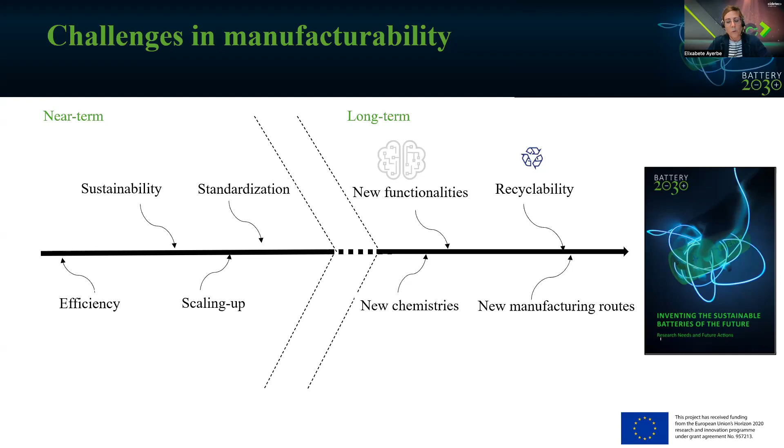So all of this is covered within the Battery 2030 Plus roadmap, particularly in manufacturability. We have addressed these activities from the Industry 4.0 perspective—we aim to have digital tools covering not only manufacturing but also cell performance. Starting from current lithium-ion manufacturing routes like roll-to-roll, we should have very accurate models that mimic the processing and machine performance, so we can control how machine parameters impact outcomes on components like electrodes, cells, or steps like electrolyte filling.

Within the roadmap, we visualize these accurate models that mimic manufacturing but also need to be computationally efficient. This relates to manufacturing, but we cannot forget the digital twin of cells, in which we mimic all the scales of the cells and are even capable of virtually reproducing cell degradation. This is seen in the roadmap as a coupled vision, coupling cells together with manufacturing, so that in the end we're able to perform inverse design—for a certain application, we can know exactly which are the best components and how they need to be manufactured.

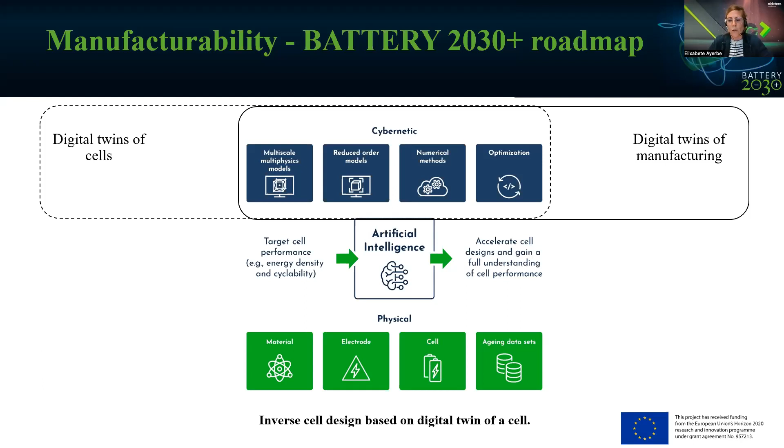So these digital twins will accelerate the scaling up, make manufacturing more efficient, and for sure more sustainable. This is seen from a very holistic view.

We are dealing with digital twins capable of mimicking these cells from a multi-scale approach, which can be multi-physics based models, but also data-driven models or even surrogate models, in order to have efficient codes that can reproduce cell behavior over a number of cycles, coupling and addressing all the scales along the cell. These digital twins of cells will be coupled to digital twins of manufacturing.

We also need to address the flexibility or modularity of manufacturing, because currently we are working on roll-to-roll applications where we manufacture electrodes through different steps like slurry preparation, drying, coating, or calendering. But in the near term or longer term, there might be different manufacturing routes like additive manufacturing, 3D printing, extrusion, or whatever is needed for the different chemistries that will come out soon.

So in Battery 2030 Plus, this is seen as a holistic view. We're dealing with standards, providing guidelines, recommendations, and a standard language in order to monitor all the manufacturing steps. But we cannot forget that within Battery 2030 Plus, we have set up different approaches like BIG-MAP, or even self-healing and sensor implementation. Manufacturing somehow closes all these aspects already covered within Battery 2030 Plus, and we include them as a way to accelerate the scalability of these approaches.

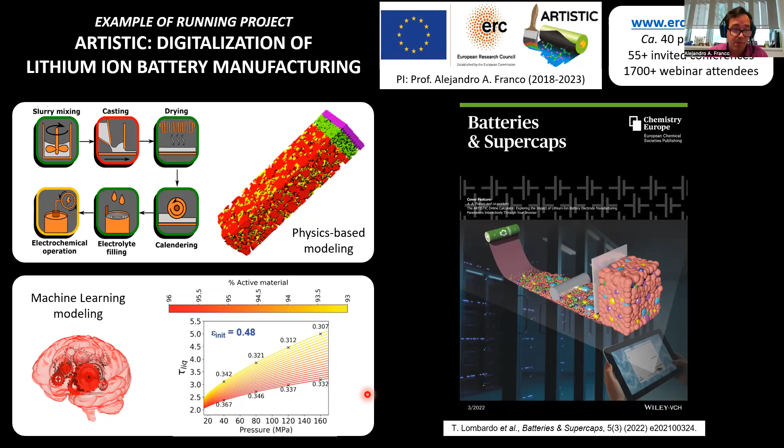For the followers of this project, you will see that I will share some old examples, but also several new examples from some of our very recent publications, published this year or even yesterday. So then the first question is: manufacturing digitalization.

Why should we try to digitalize the manufacturing process of lithium-ion batteries in particular? As you know, lithium-ion batteries are everywhere, even allowing the re-emergence of electric vehicles. Inside the cells of these lithium-ion batteries, we have electrodes. Depending on the spatial location of the active material, the conductive additive, mostly carbon particles, and the binder, this cell is going to have different energy densities, power densities, lifetime, and safety.

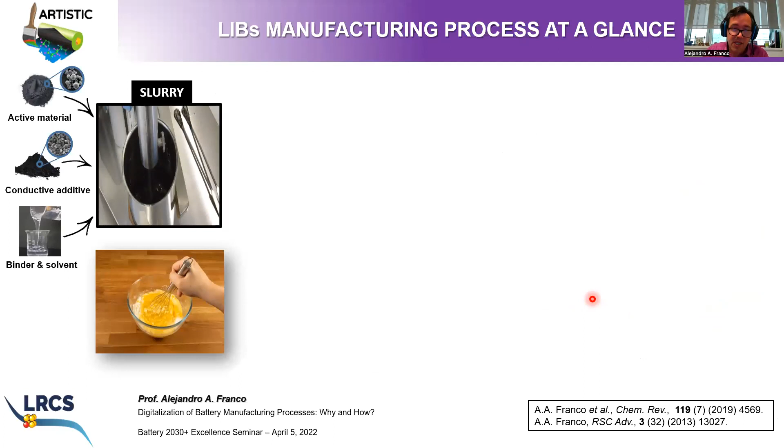Therefore, it's very important to control the interfaces between these materials inside the electrodes. In order to control these interfaces, we need to talk about how we manufacture these electrodes. The manufacturing process of lithium-ion battery electrodes is highly complex, involving multiple steps and multiple parameters.

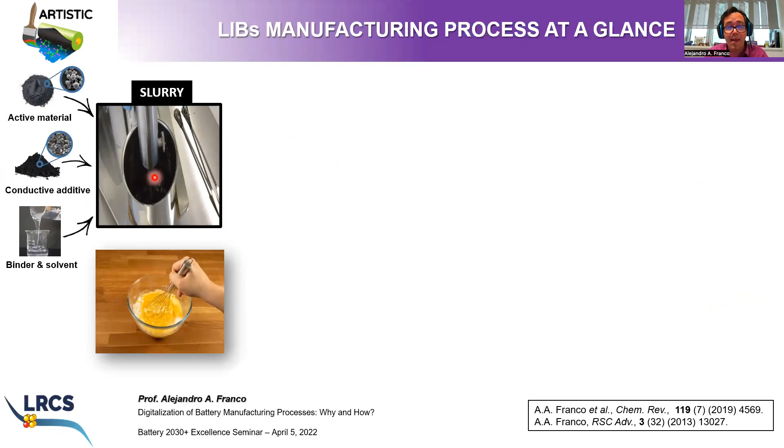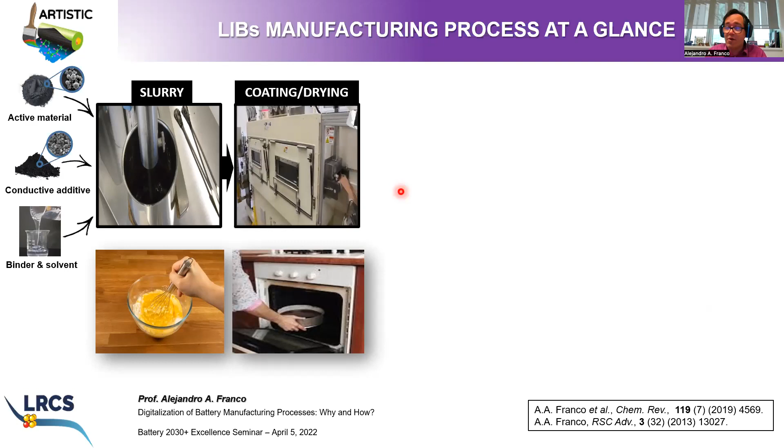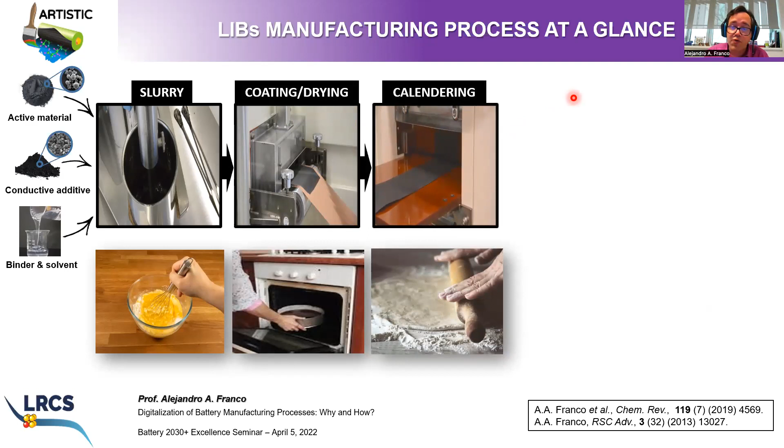First, what we do is mix materials in a solvent: the active material, the carbon additive, and the binder. We mix them to prepare the so-called slurry. Then we cast the slurry on a current collector to prepare the first electrode of the lithium-ion battery cell. We pass the resulting coating in an oven to evaporate the solvent, and then we get the dry electrode. Then we perform the calendering, which consists of applying pressure on top of the electrode to improve the electronic contact between the particles. Then we perform the same process for the second electrode.

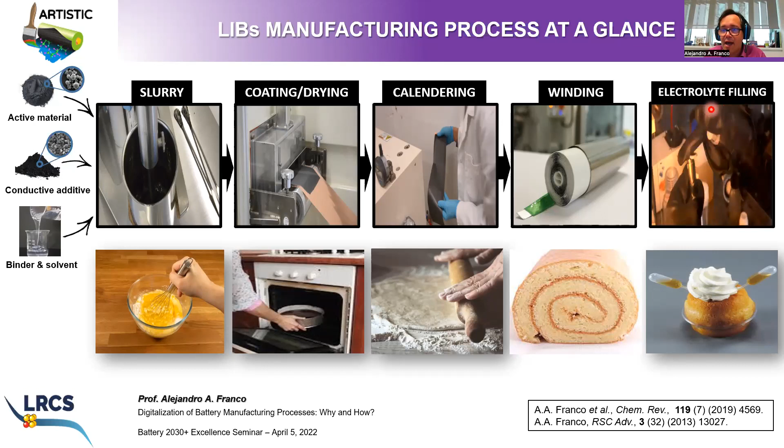We will put a separator in the middle, and we will perform the winding, in case we are interested in cylindrical cells. The step after this one is, of course, the electrolyte filling. We need to fill the cell with a liquid electrolyte in order to ensure the proper exchange of lithium ions between the two electrodes. Then we are going to close the cell, and we will get this lithium-ion battery cell ready to use.

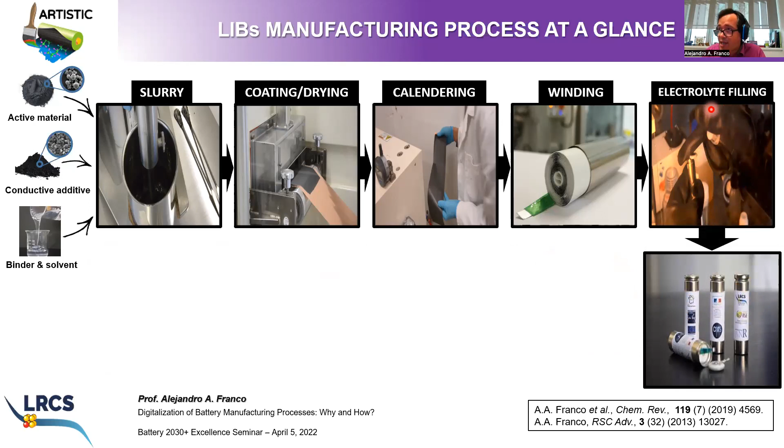So as you saw in the slide, manufacturing a lithium-ion battery electrode is like cooking. You really need to choose the right parameters in the right way in order to make proper battery cells. Indeed, when you take a look at the number of parameters involved along this manufacturing process, what we can say is that this is a very complex parameter space because we have multiple parameters, but also a lot of interdependencies between these parameters.

You can actually represent the lithium-ion battery manufacturing process as different gears which are linked with each other in a sequential way. And if you remove or tune improperly one of these gears, then the final result, which is a lithium-ion battery cell, will not be what you desire. This is why it's very important, first of all, to understand the links between these different process steps and the impact of these links and the involved parameters on the resulting lithium-ion battery electrode microstructure and also lithium-ion battery cell performance.

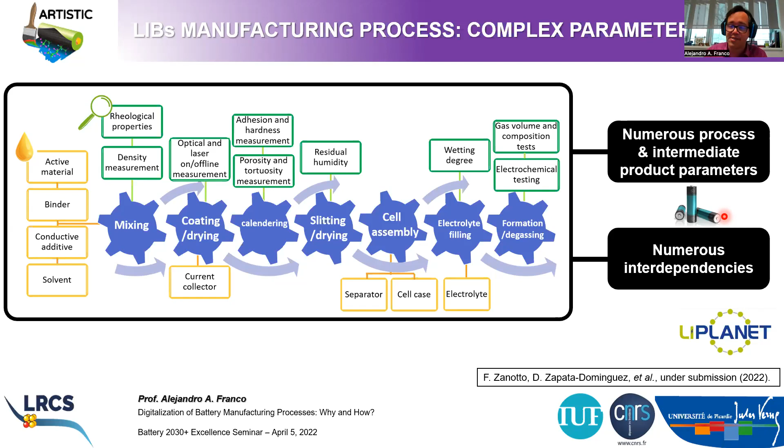State of the art for doing this is trial and error. And of course, if we are doing trial and error, we should expect high scrap rates. If you are, for example, at the prototyping level, we could estimate that you will have scrap rates of around 30%, while if you are manufacturing cells in series with very well-established protocols and so on, maybe you will be around 5%. But still, this is a lot.

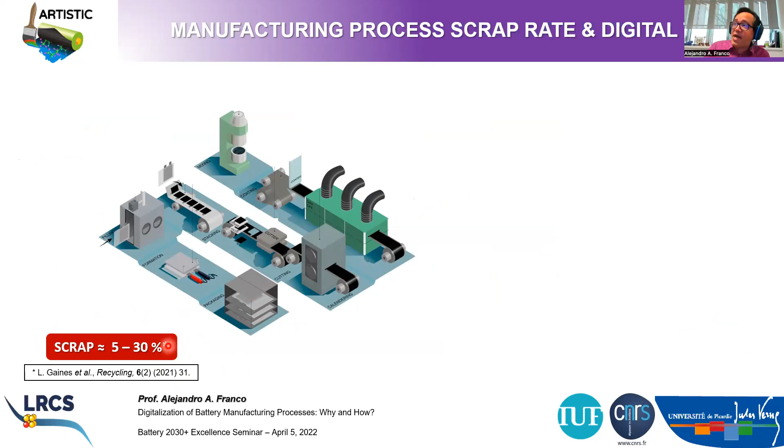Something that battery manufacturers are dreaming of is having somehow a digital twin, which is actually a copy in the computer of the actual manufacturing process, which can provide through actuators real-time indications to the machine on how to optimize the manufacturing process of the lithium-ion battery electrodes.

In order to have this concept working, in order to have this digital twin that can provide real-time instructions to the machine, of course we need also to implement sensors in the machine. So the topic of sensing is also very important towards the development of a digital twin, because these sensors are going to collect real-time data in the machines and fill this digital copy in order to feed it, so that this digital twin can provide recommendations to the machines.

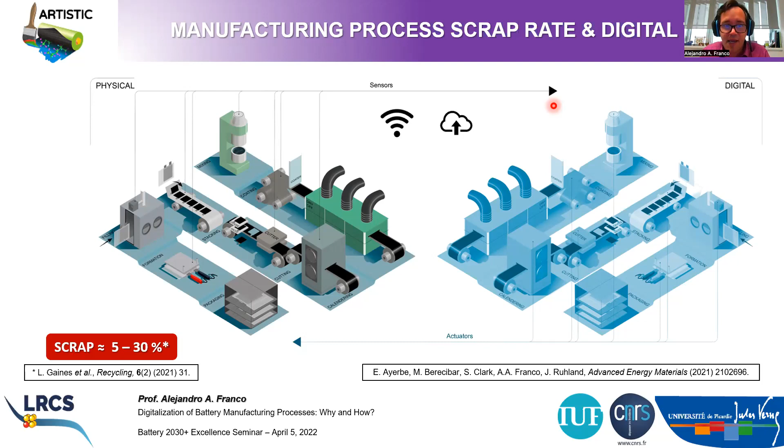But what do we have in the core of this digital twin? How is this possible, how can we imagine copies in the computer that can provide real-time recommendations to the machine in a way that the machines can by themselves optimize the different manufacturing steps involved in this process? Well, this is possible because in the core of a digital twin, what we have are models, computational models. And we imagine two types of models in the core of this digital twin.

So physical models, which are actually models based on the description of the physics going on between the different particles, which are being mixed, which are being cast, which are being dried, and so on and so forth. These kinds of models can be very useful for understanding in more detail the different manufacturing steps and the influence of the different manufacturing parameters on the electrode properties, but also they can be very useful for predicting the influence of manufacturing parameters on electrode properties and cell performance.

On the other hand, we can have machine learning models. These machine learning models are very, very useful tools to discover correlation between input parameters and output parameters. And this is very important, in particular, when you are dealing with a highly dimensional parameter space. So we are dealing with many parameters, and this is typically the case in lithium-ion battery manufacturing.

These models can also be very useful to derive surrogate models, simplified versions of the physics-based models that can be integrated in optimization loops, that means in algorithms that can perform quasi-real-time optimization. So these types of models, they have both cons and pros. First of all, if we talk about the physical models, if you go to a three-dimensional description of the battery manufacturing process, you can get very high accuracies.

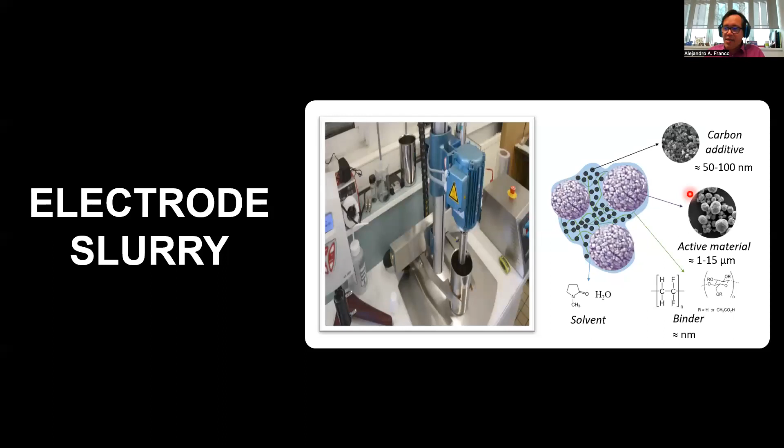So you see then that these two techniques are highly complementary, in the vision of developing a digital twin. This is why in the project we are dealing with both: modeling the manufacturing process based on physical models, and modeling the manufacturing process based on machine learning models. In the next 50 minutes, I'm going to show you examples of different models that we are developing in this project for each step of the manufacturing process, starting with the electrode slurry.

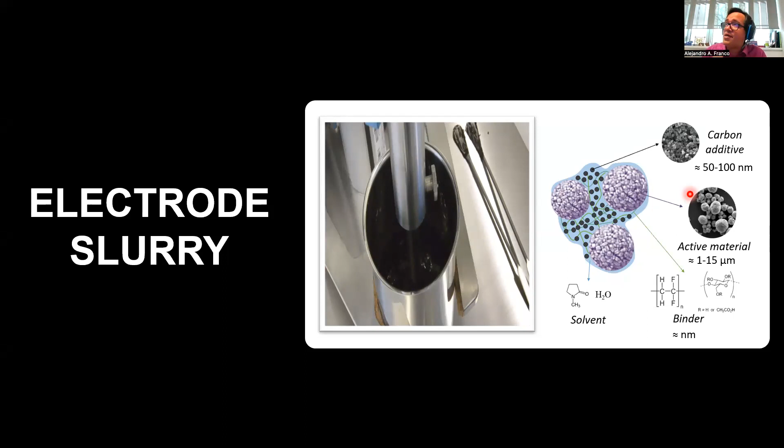The electrode slurry, as I mentioned at the beginning, is a suspension of active material, carbon additive, and binder in a solvent.

In order to model that, based on a physical modeling approach, we use a coarse grain representation of the particles which are in the suspension. And we define basically two types of particles for non-aqueous slurries, which are representative, for example, of slurries containing NMC 111 as an active material.

The two types of particles that we use are the active material particle, which is the grain representing an active material particle, a secondary particle of NMC 111, and a second grain, which is the CBD particle. CBD stands for carbon binder domain, and this particle contains carbon, binder, and solvent.

We do it this way because if you start to describe all the atoms and molecules present in this system, you will need a very huge computational cost in order to solve the system of equations that will allow you to predict the slurry structure. That's why we simplify the system with this coarse graining approach, and instead of representing the interaction between atoms or molecules, we represent interaction between these effective particles: grain, active material, and CBD.

Thanks to this simulation, we are going to be able to predict in 3D microstructures of slurries. The input of this model, this coarse grain molecular dynamic simulation, will be the active material particle size distribution, which is something we can extract from experiments, and the formulation, the weight percentage ratio between active material and CBD.

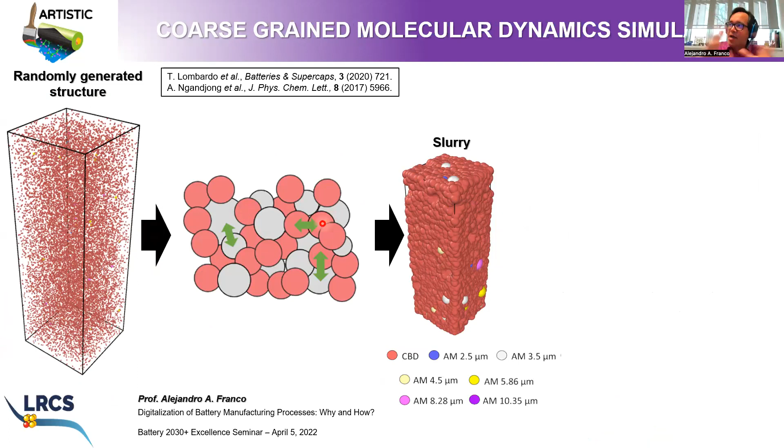Then you will solve the interaction forces between these different particles. More precisely, you will solve Newton equations with forces acting on each type of particle, resulting from Lennard-Jones force fields and granular Hertzian force fields that describe attraction and repulsion between the particles.

They are going also to describe the cohesion between the particles, the viscous behavior of the collection of particles, and so on and so forth. And then by solving these Newton equations, you will reach at some point the equilibrium state, minimal energy of the system, and you will converge to the slurry microstructure.

Once you get this virtual slurry microstructure in the computer, you can characterize it in terms of the density, in terms of the viscosity, and then you can compare the numbers that you get in the computer with the ones that you can characterize at experimental level.

Here you see examples for the viscosity calculated as function of the applied shear rate for two different slurry formulations and for different solid contents. And you see here a very good comparison of what we calculate with the model with what we can get at the experimental level.

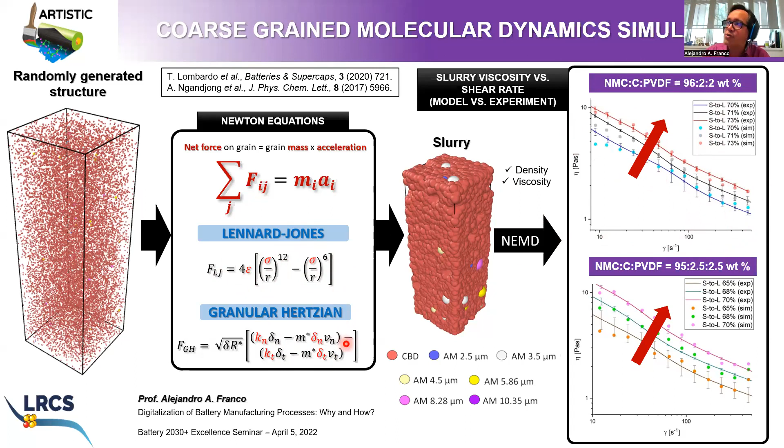Here, of course, in order to have this very good fitting, what we do is we fit the parameters, these 6 parameters which are represented here in red in the equations, in order to match perfectly all the conditions. In order to do so, we use optimization algorithms - particle swarm optimization and machine learning.

Just to give you a flavor of how we do this, we basically use this combination of a technique called functional principal component analysis and k-nearest neighbors, which is a kind of machine learning technique, in order to predict the result of this coarse grain molecular dynamics simulation before the simulation ends. In that way, as we can predict from the very early steps of the simulation, we can predict what will be the viscosity value that the simulation will be able to obtain.

Then we can integrate this forecasting technique in an optimization loop that allows us to fit the experimental curves more quickly. And this concept, which we have published very recently as a preprint, it works for slurries made of NMC 111, LFP, or graphite. Before, we were needing few days to fit a viscosity curve with one of these models. Nowadays, we need only few hours to fit a full viscosity curve coming from experiment with this kind of model.

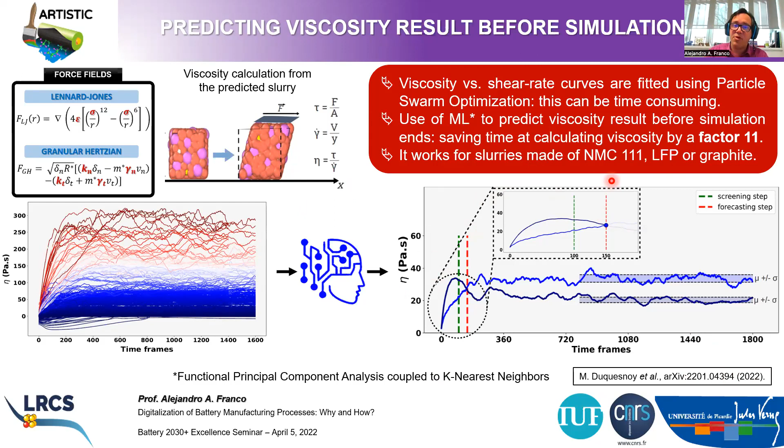The second step is the coating and the drying. And this is something that we simulate also using coarse grain molecular dynamics. And the way that we proceed is the following: so we take this virtual slurry.

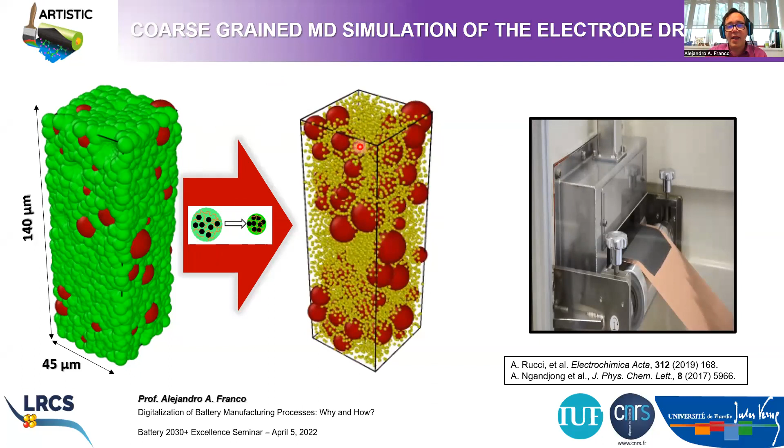We shrink the CBD particle size in order to mimic the solvent evaporation. Then all these green particles here representing the CBD, which initially contains carbon binder and solvent, they become smaller. They're represented now here in yellow. Then the interaction forces between the particles change, and then we relax the system again.

So we run once again molecular dynamics, we solve Newton equations. And then the final state of this simulation will be the dry electrode microstructure. And this dry electrode microstructure, you see here in red, the active material particles, and in yellow, the carbon binder domain, which in this case doesn't contain any more the solvent.

And this virtual electrode microstructure can be validated with, for example, different type of descriptors, such as the porosity of the virtual electrode. And this porosity of the virtual electrode can be compared with the experimental one. But also you can imagine calculating the electronic conductivity of this virtual electrode, the tortuosity factor, and so on and so forth, and compare also with the experimental values.

The model is also able to capture the impact of the drying rate on the microstructure, and in particular on the phenomenon called CBD migration or carbon binder migration. And here you see how this works.

Basically in the model, we imagine that the CBD will shrink at different rates depending on the depth of the slurry. So if you are on the current collector side, the CBD will shrink at a rate much slower than the one that is on the top. And in that way, we are able to calculate, to predict electrode structures that will be heterogeneous along the electrode thickness in terms of CBD volume fraction.

And this is something that can be very nicely also quantified. If you track the evolution of the CBD volume fraction along the thickness of this slurry that then is becoming an electrode, you see that for high drying rates, if you focus, for example, on this series of 3 red curves, you see that there is a high heterogeneity. You have much more CBD on top than at the bottom.

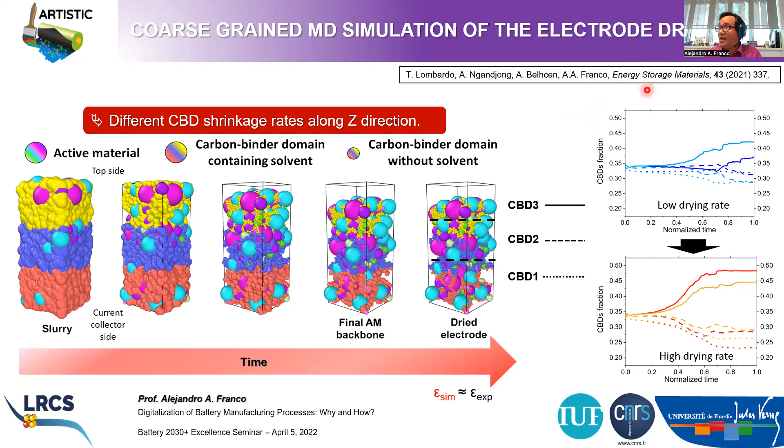You can also address the topic of slurries, coating, and drying using machine learning. This is a quite old work that we published actually two years ago, but as far as I know it was the first one addressing this problem using machine learning.

Basically, what we did is collect experimental databases. As an input, we were playing with the slurry formulation, the solid content, and the viscosity, and we were measuring the impact of these three parameters on the active loading of the electrode and the porosity of the electrode at fixed drying conditions. So we collect this kind of data set here that you see, they're very noisy, you cannot tell anything very clearly here.

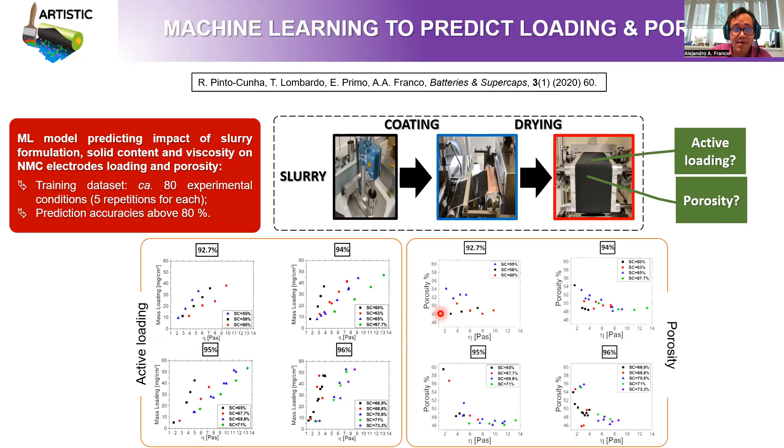So what we performed is an application of machine learning, a supervised machine learning technique called support vector machine, which allows transforming these noisy data sets into something more understandable or readable by experimentalists. Basically, this support vector machine technique allows transforming this cloud of points into phase diagrams for battery manufacturing. Here you see an example of the kind of result that can be obtained with this technique.

Here you see the impact of the formulation, meaning the amount of NMC in your slurry in weight percentage, the impact of the solid content of your slurry, and the impact of the viscosity of the slurry on the porosity that you will get in the electrode after the drying process.

This output is telling you that, for example, in order to make electrodes with low porosity, which in this case means electrodes with more or less 30 to 35% porosity, you need to choose the appropriate content of NMC, the appropriate formulation, and also the appropriate viscosity for your slurry and the appropriate solid content.

Because if you choose, for example, a viscosity that is too low and a solid content between 60 and 70, it will be impossible for you to make electrodes with low porosity. If you want an electrode with low porosity, you need to increase the viscosity value and mostly use high solid contents. This is the kind of outcome that this machine learning modeling can give you.

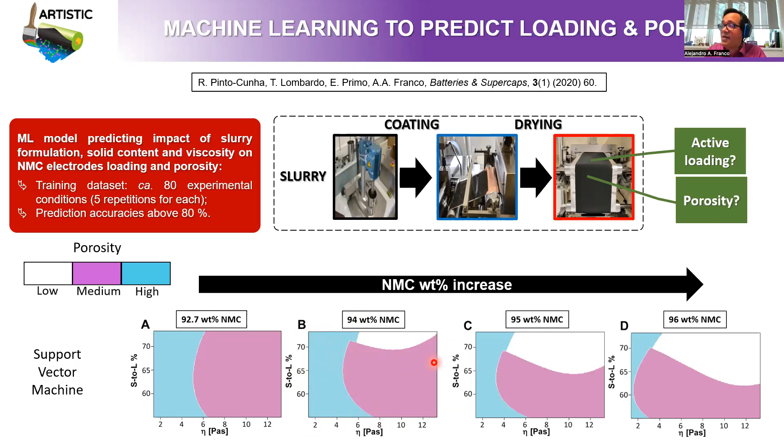We believe this is very useful for experimentalists because this is a kind of phase diagram that can very easily be understood, for example, by the technician making battery electrodes in the pilot line.

This concept for casting, mixing, drying, and so on can also be extended to other battery technologies, in particular solid-state batteries. This is a work we jointly published with the group of Shirley Meng last year, where we extend the methodology developed in the previous paper to the concept of developing solid-state separators.

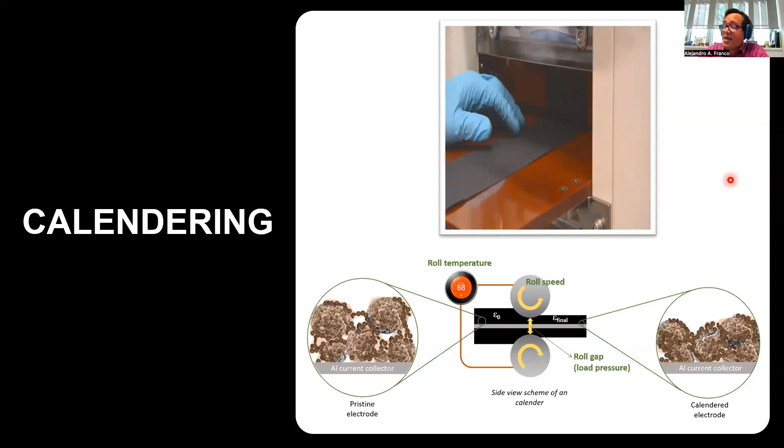The next step in the digitalization of battery manufacturing is the calendering. Calendering is a very important step because you need to press the electrode in order to improve the electronic contact between the particles.

But at the same time, you need to avoid pressing too much, because you will otherwise collapse the pores, and then it will be very difficult for the liquid electrolyte to go in. You'll have problems with wettability of your electrodes. So it's very important to optimize this process and perform calendering, but not too much. This is why modeling can be very useful here.

To model the calendering process based on a physics-based approach, we use a technique called discrete element method. This technique is like molecular dynamics, where you describe the interaction between particles, but instead of describing interactions through Lennard-Jones or granular Hertzian potentials, you describe interactions through mechanical forces.

So the input of this discrete element method model is the electrode microstructure predicted from the drying model. And remember that the input of the drying model is the slurry microstructure predicted from the slurry model. So you see that the models are sequentially connected.

It's really a digital twin of the real manufacturing process, from the slurry to the calendering. This discrete element method model is able to predict the impact of, for example, pressure, or degree of compression, on the microstructure of the electrode.

Here you see an example of simulation for one applied pressure. The model is able to predict how compression compresses the electrode - the thickness decreases, and then you have a plastic behavior there. But also you see that at the end of the compression, the electrode recovers a little bit of the initial thickness, so there is a recovery effect.

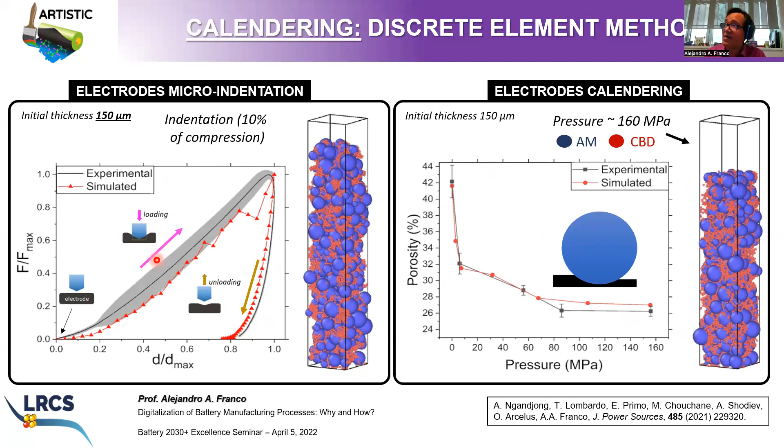Once we get these electrode microstructures coming from the calendering simulation - where in blue you have the active material particles and in red you have the CBD - we use a software called Innov. It's a software that we developed in-house in MATLAB, capable of transforming these files, which are represented here. The output actually looks like a collection of spheres placed in space.

It transforms this file into something readable by computer programs able to calculate, for example, the tortuosity factor of your electrode, or programs able to simulate the electrochemical performance of the electrode, like for example COMSOL Multiphysics.

More precisely, what this software does is apply a technique called voxelization, or meshing. It meshes the electrode microstructures in a way that can be read by computing programs capable of simulating electrochemical performance or calculating properties such as the tortuosity factor.

When you apply this voxelization technique or meshing procedure to these electrode microstructures predicted from the calendering, you get electrode microstructures that don't look anymore like a collection of spheres. They look more like a real tomography image of an electrode, which is very nice at the end of the day.

Then what you can do with this is inject it into a software. In this case, we use Tau Factor, which is a software developed at Imperial College using MATLAB. Then we can evaluate the impact of the applied pressure on the tortuosity factor along the Z direction, which is the thickness of the electrode, but also the impact of calendering pressure on the tortuosity factor across the plane, across X and Y.

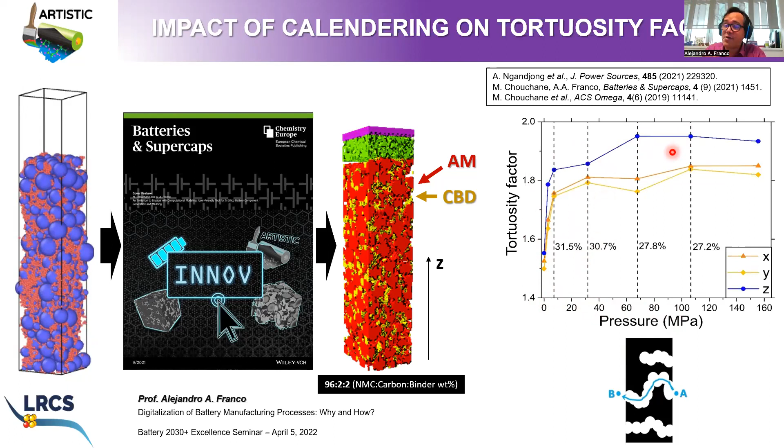So this is very interesting, as you will see later on, because if you have electrodes that have been calendered a lot, you will have high tortuosity factors, and therefore for the electrolyte wettability, you will have more troubles.

This work, which consists of simulating slurries, drying, and calendering using the physics-based model, was extended for other types of materials—beyond NMC and beyond graphite, the materials I was talking about at the very beginning of this seminar. So we extended this work for organic materials for sodium-ion batteries, as a demonstrator that these artistic manufacturing models are chemistry neutral. They can apply to different types of chemistries, even ones far away from what we currently use commercially in lithium-ion batteries, like NMC 111, graphite, and so on. Here we move from lithium-ion batteries to sodium-ion batteries, from inorganic to organic active materials.

So we move from commercial NMC, for example, to an in-house synthesized active material, which is this NH2-BPDC. We also move from NMP-based slurries, which we simulate with NMC 111, to water-based slurries. And we move from a high active material weight percentage, typically 96% for NMC 111 in our simulated slurries, to a much lower one, typically 60% for NH2-BPDC. What we did is characterize experimentally the viscosity curve as a function of applied shear rate, and fit the calculated viscosity with the coarse-grained molecular dynamics model, representing this collection of active material particles and CBD containing carbon additive, binder, and solvent.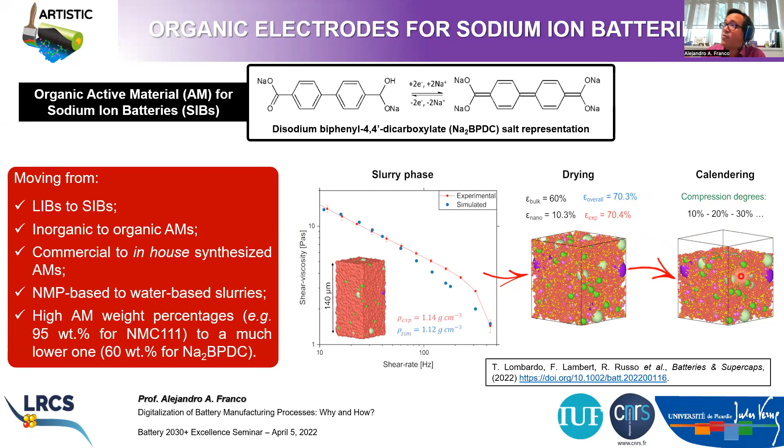Then we characterize these virtual electrode microstructures in terms of their electronic conductivity and their tortuosity factor through the pore network, which is supposed to be wet with the liquid electrolyte to transport sodium ions. We plot this kind of graph showing the ratio between the calculated electronic conductivity divided by the tortuosity factor of these virtual electrodes. The model predicts that when you increase the compression degree, this ratio starts to increase because the electronic conductivity gets better and better as you percolate more and more particles.

But then you reach a kind of optimum, because here you're dividing by the tortuosity factor. That means if you compress too much, the tortuosity factor becomes higher and higher with compression degree, and at some point becomes too high. Then the penalty from this increase in tortuosity factor overcomes the benefit you get from compressing the electrode on electronic conductivity. This is why, from the modeling point of view, if you keep compressing, this ratio will decrease. The model also says—something I'm not showing here—that you cannot compress more, because then the simulation becomes unstable; particles move in a crazy way. It's somehow reaching the physical limit of the model.

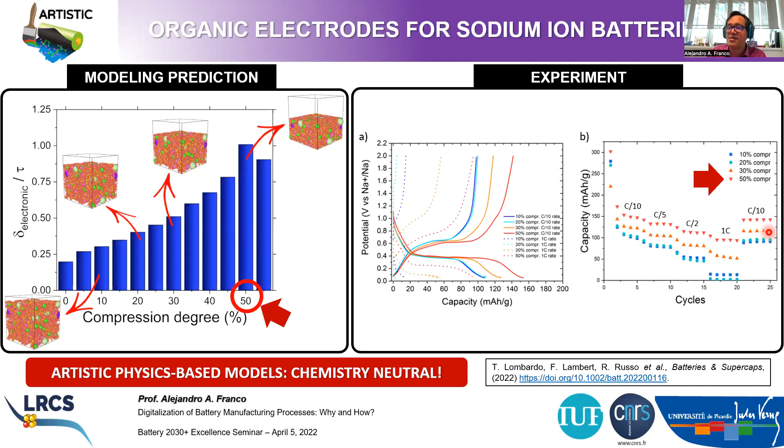What's interesting is that we found something very similar at the experimental level. When you make electrodes with different compression degrees following the same protocol we established computationally, you see the electrode with 50% compression degree versus the initial thickness is the one that performed best. Also, experimentally, we show it's impossible to make electrodes with this formulation above 50% compression—if you try to compress more, the particles start to crack and you cannot cycle the battery. We believe this shows once again that these artistic physics-based models are chemistry neutral, since we've demonstrated we can move beyond lithium-ion batteries, beyond commercial active materials, and even to organic batteries.

You may wonder why we use a spherical representation of active materials in these models. But as you could see in the previous slide, it's a satisfactory assumption, because you can still make good predictions and get good validation with experiments using the spherical approach. Nevertheless, we have developed an approach which is more sophisticated and even more realistic in terms of representation of the system.

Here, what we did is start from tomography images, micro CT tomography images. Then we developed an algorithm able to extract the real particle morphologies from these micro CT images. We perform all the simulations of the slurry, the drying, and the calendering using the real particle morphologies, and then we compare the outcomes in terms of microstructure with what we get from tomography, for different formulations and compression degrees.

We believe this is a step forward towards a digital twin of the manufacturing process, because now we are able to take into account real particle shapes, and not only spheres. Even though with spheres we can get satisfactory results and good predictions anyway. The take-home message is that you don't have to complexify the model if it's not needed, but here we wanted to do it just for fun, to see if we're capable with this workflow of simulating the manufacturing process with real particle shapes. The answer is yes, and this is a paper currently under submission.

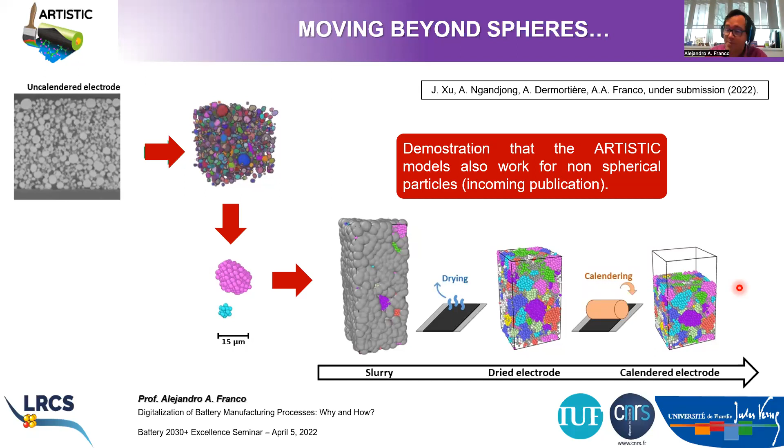You can also address the calendering process steps using machine learning. This is something we published a couple of years ago.

Here, basically what we have done is play at the experimental level with electrode formulation, and also measure the thickness of the electrode before applying the calender, before the calendering process. We also play with the calendering pressure. Then we inject this experimental information into an electrode microstructure generator based on a stochastic algorithm. This is a generator of 3D microstructures of electrodes, where you can nicely locate in space active material particles, CBD, and pores.

Then we characterize these virtual microstructures in terms of a series of properties such as the tortuosity factor, and the surface area of contact between active material and pore, which is supposed to be the active surface area, because the pores are supposed here to be fully filled with liquid electrolyte. Then we train with this data set a machine learning model that is able to perform regression predictions, meaning predicting numbers.

Here you see a couple of examples of what you can get with this model. You can predict the influence of the calendering pressure, the electrode formulation, and the porosity before calendering on the tortuosity factor of the electrode. Here, instead of having a phase diagram like in the coating and drying process I described before, you have curves.

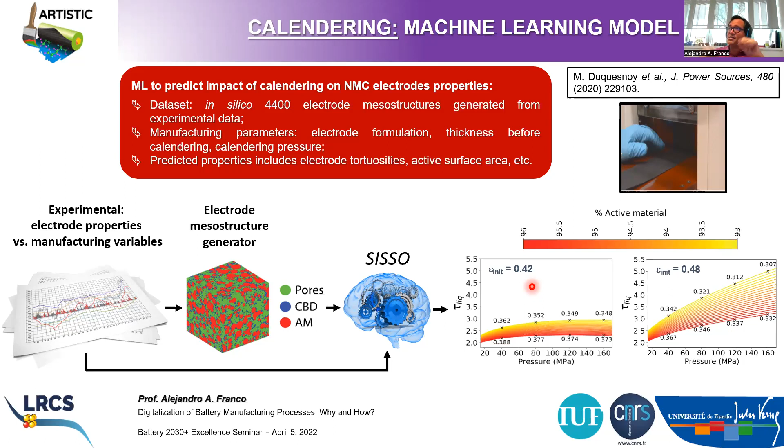This is something we had already studied before in one of my previous slides. But also, the degree of increase of this tortuosity factor depends on the electrode formulation, and also on the porosity before calendering. This shows the complex interdependency between parameters: calendering pressure, formulation, and porosity of the electrode before calendering, and how these parameters impact the tortuosity factor of your electrode. Machine learning is a wonderful tool to unravel these correlations. Establishing this correlation just by hand, analyzing a data set like an Excel file, would be very challenging.

You can go a step beyond. With this machine learning tool applied to calendering, you can also include other parameters such as the roll speed in the calendering process or the roll temperature in this calendering machine.

The next step, talking about the digitalization of the manufacturing process, is the electrolyte infiltration. This is a very important step because we want the pores inside the electrodes to be fully wet with liquid electrolyte.

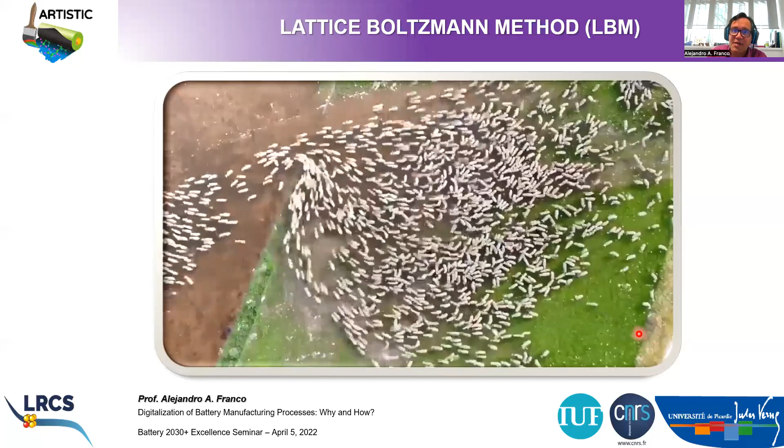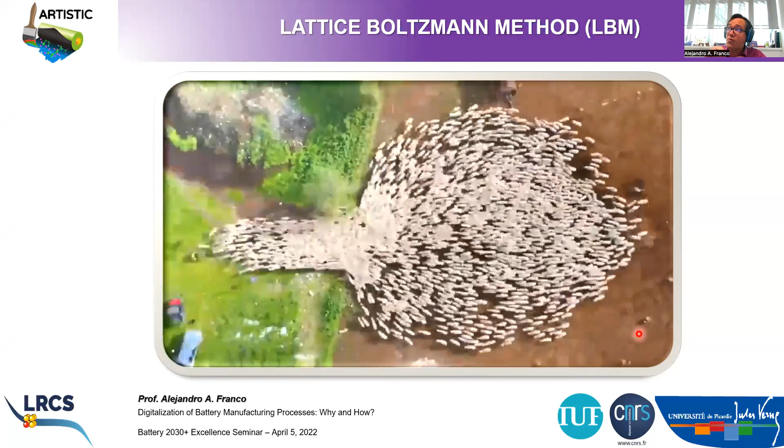This is something we can simulate using physics-based models, in particular a technique called the lattice-Boltzmann method, or LBM. LBM is a model which represents fluids as a collection of particles moving following some specific rules of motion. This fluid being represented can be the liquid, in this case the electrolyte, but it can also be a gas like the air, which is initially present in the porosity of the electrodes.

In this video you see sheep - this is not a simulation with LBM, this is real life, but it's just to give you the feeling of how this model looks. If you zoom a lot into the model, you will see particles moving, but when you zoom out, you will have the feeling that this is a continuum - a fluid moving - but actually it's a collection of particles moving in the model.

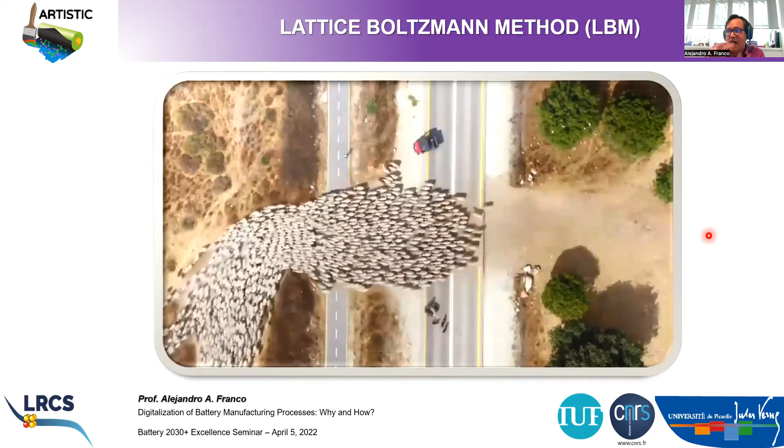This is what you see here - this is the macroscopic view of the result of the LBM. Imagine there are plenty of tiny particles moving there, but you have the feeling this is a continuum. You see the result for the infiltration of electrolyte in an uncalendared electrode, which is very quick, and the simulation of infiltration in a calendared electrode, which is very slow. The reason is that in a calendared electrode you have a higher tortuosity factor - pores are interconnected with each other, but the more tortuous it is, the more difficult it is for the electrolyte to go through. This is something the model can recover very well - this is good news, though it's kind of trivial.

But something the model can also provide is a prediction of where the air is going to remain trapped inside the electrode porosity. This is very important because if you have air trapped in some regions of the electrode volume, some part of the active material is not going to be properly wet with liquid electrolyte. Then you are not exploiting the maximal capacity of your electrode, because those parts of the active material will have more trouble being intercalated with lithium ion, or deintercalated with lithium ion.

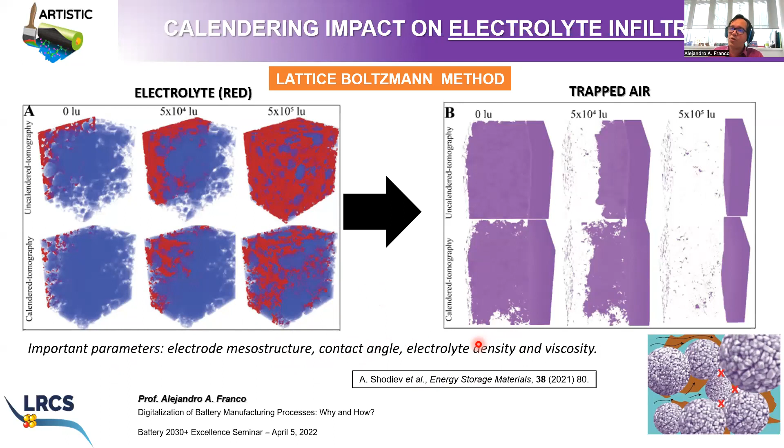This wettability phenomenon strongly depends on the electrode mesostructure, as we studied today - if you have a calendared or uncalendared electrode, the speed of infiltration of electrolyte will be different. But it also depends on the contact angle of the electrolyte with the electrode, on the electrolyte density, and on the electrolyte viscosity. These are all parameters you need to take into account in order to optimize the infiltration process of the electrodes by liquid electrolyte.

This is something we extended just yesterday - we published this paper yesterday, which is an extension of this work, where we screen different wettability of different electrode microstructures. Here we are playing with the uniformity or heterogeneity of porosity and particle size distribution of active material in the anode and cathode. This is a simulation of the infiltration process now in the full cell, in the sandwich, where you have the anode on one side, the cathode on the other side, and the separator in between.

Using tomography images as microstructures for these simulations, we can explore how fast electrolyte infiltration will go through different configurations. Here you have electrodes with homogeneous porosity, and here you have electrodes with a gradient of porosity along their thickness.

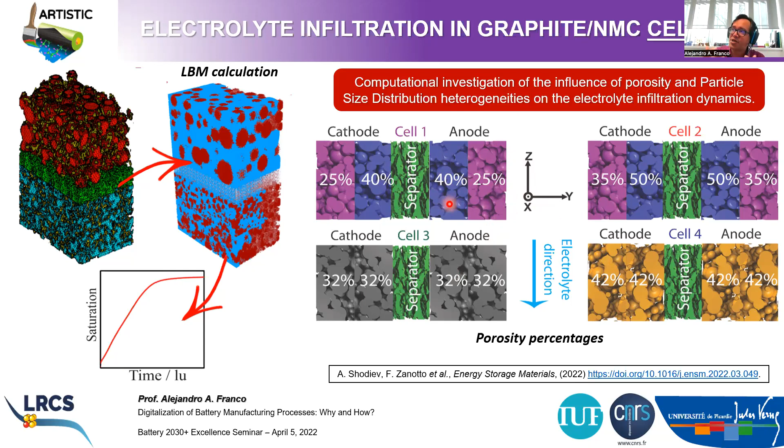But you can do the same with the particle size distribution. You can imagine, for example, on this side particles which are smaller, and here particles which are larger, and the same for the cathode. Here you see an example for this second case, studying the influence of this distribution of particle sizes along the electrode thickness.

Basically, you have a bilayer structure, so you have smaller particles on one side and bigger on the other side. Then you compare that with a homogeneous particle size distribution in the full volume of the electrode. I'll play the video again.

So you see that the heterogeneous case offers a faster wettability. Infiltration of electrolyte looks to happen faster compared to the homogeneous case. And this is exactly what is summarized here in this figure.

So if you have an electrode with a bilayer structure, where you can tune the porosity, you can tune the particle size distribution—use maybe smaller particles in one layer and bigger in the other, or bigger pores in one layer and smaller in the other—you can speed up the saturation of your cell sandwich. You can basically accelerate the electrolyte infiltration of your cell.

We believe this work is interesting because it can pave the way towards a computational screening of the influence of electrode microstructures on the wettability of lithium-ion battery cells.

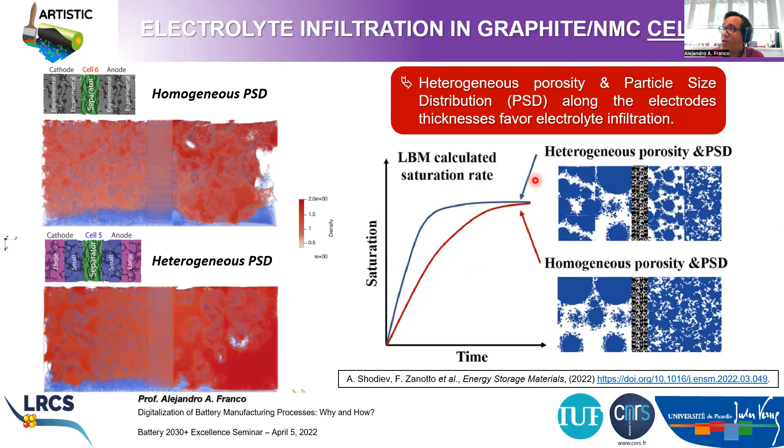In order to do high throughput screening with computers, the optimal way is using a machine learning model, a surrogate model, instead of the LBM, because the LBM is computationally costly. One of these simulations I showed you before can take a couple of days to run, while a surrogate model can run in a few seconds.

So here is what we performed in this work that we published last year. We derived, from the data coming from these LBM simulations of electrolyte infiltration, a machine learning model that is able to predict the saturation curves.

That means the amount of liquid per unit volume of pore in your electrode microstructure as a function of time, for different pressures applied during this infiltration process. This model is also able to reproduce very nicely the trajectory of the liquid electrolyte in the pore network inside the electrode.

The advantage, once again, of this surrogate model based on machine learning is that it can make predictions in a few seconds instead of a couple of days, which is what you need with LBM.

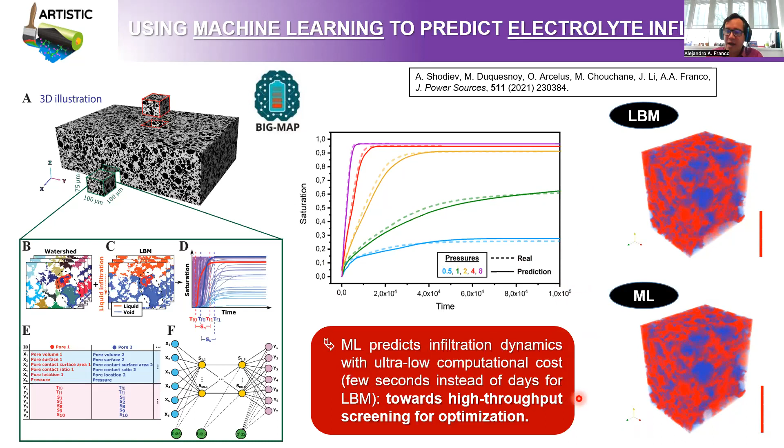This is why we believe that this surrogate version of the infiltration model can really pave the way towards high throughput screening to find the optimal conditions to infiltrate electrodes properly—to maximize the wettability of electrodes with the liquid electrolyte.

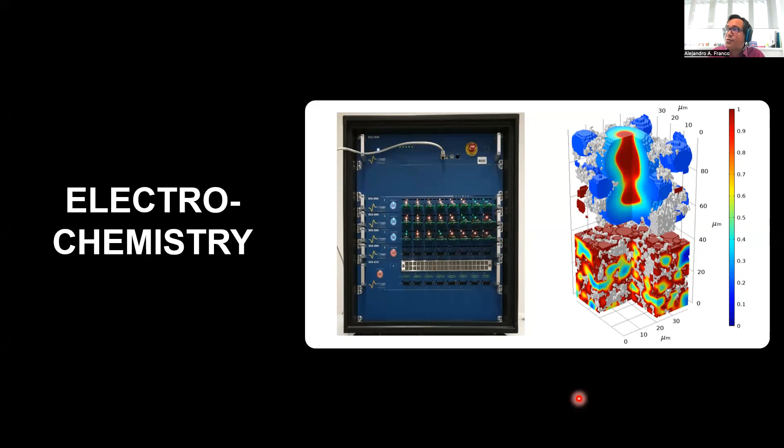The last step towards the digitalization of this battery manufacturing process is, of course, the electrochemical performance of these virtually generated electrode structures from the manufacturing simulations. Here you see the entire workflow.

So we start from the simulation of slurries and also the calendering, using CGMD—coarse grain molecular dynamics—and the drying as well, and discrete element method. We can use the lattice-Boltzmann method, or the surrogate version of the LBM using machine learning, to predict the electrolyte infiltration.

The resulting microstructures, which consist of the spatial localization of active material, CBD, and electrolyte in the volume, can be meshed using our software to then inject the resulting mesh structure into a software able to simulate the electrochemical behavior of the electrode.

In such a way, you can, for example, predict the lithiation dynamics of your electrodes in 3D, by accounting for the physics going on in these electrodes, such as the transport of lithium ions in the electrolyte, the diffusion of lithium in the active material, the Butler-Volmer equations describing intercalation, and the electronic transport in active material and CBD—carbon binder domain—which is taken into account explicitly in all of this modeling workflow.

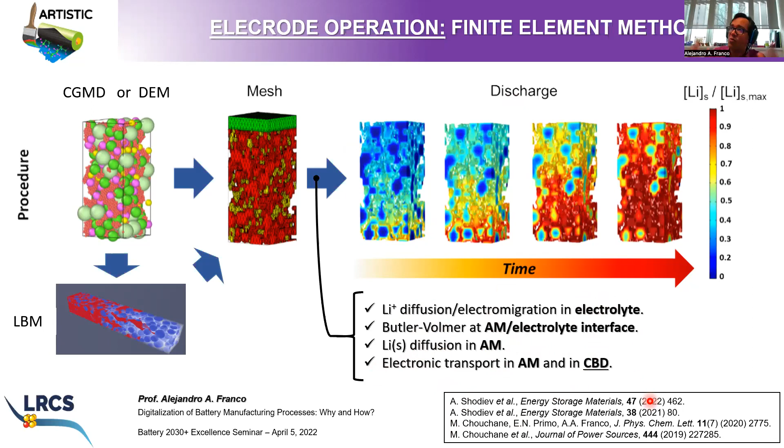So we have published several papers, and here I'm showing just three examples, reporting results of how this electrochemical performance model can be used to gain insights on the impact of manufacturing parameters on performance.

Here you see the impact of formulation, for example on an NMC electrode, on electronic impedance and ionic impedance. This is a simulated symmetric cell experiment. You see that the impedance, both electronic and ionic, is highly heterogeneous and highly anisotropic, and the reason is that the CBD is located in a very heterogeneous, anisotropic way inside each of the electrodes.

Also, you see that this framework is capable of studying the impact of particle shape, in this case graphite particle shape, on the lithiation dynamics of graphite electrodes. Here you see the case for spherical graphite and for more ellipsoidal shape graphite particles, representing different types of graphite particles that we can find in the market to manufacture anodes.

Also here you see the predicted impact of this model of the calendering degree on the lithiation, the degree of lithiation at the end of discharge of NMC electrodes. You see that the model is capable of capturing the influence of manufacturing parameters on performance, but the beauty of this model is that it can capture this in 3D, in three dimensions.

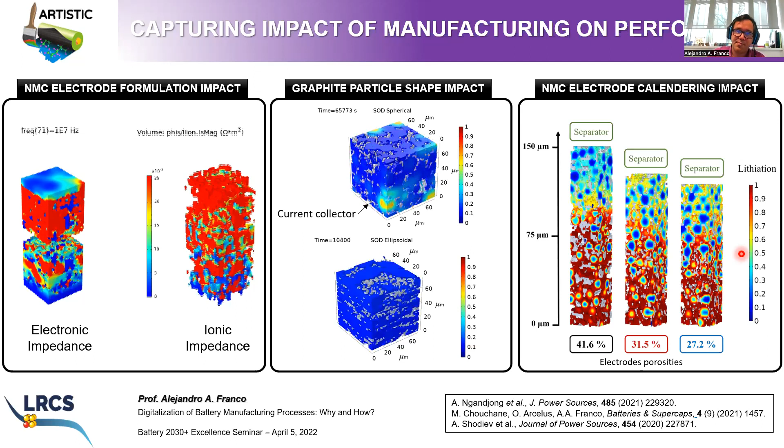And this is one of the latest works that we have published, I think about one month ago. Here we explore the influence of the CBD morphology on the discharge performance of NMC electrodes, for high porosity electrodes (HP) and for low porosity electrodes. What we show is that the electrodes having this aggregate CBD morphology perform better.

If you compare for high porosity, the green curve with the red one, versus film, they perform better versus the CBD morphology, and the same happens for low porous electrodes. We should highlight that this CBD morphology can be controlled by the drying process. You see once again the interdependency between manufacturing parameters and performance, and this modeling framework is capable of dealing with that link, all in 3D.

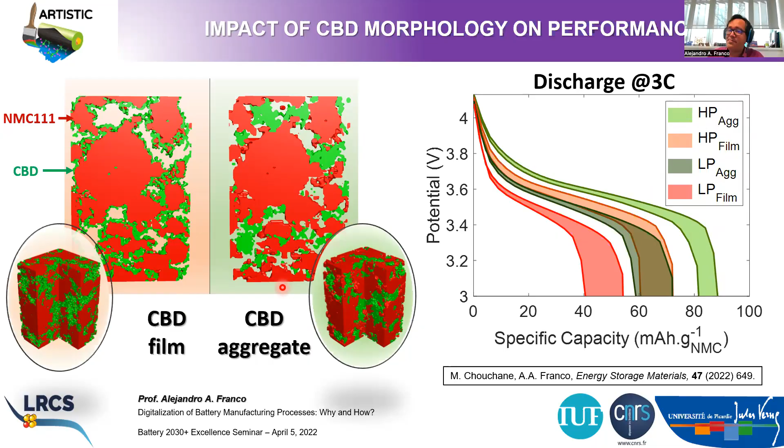Now let's talk a little about how we integrate all these models, this constellation of models, physics-based machine learning, and how based on this integration we offer online services to researchers like you, but also sometimes to the general public, or battery stakeholders in general.

So first of all, this is a recap of this artistic project workflow. We have on one side experiments going on in our prototyping line, where we perform fabrication of slurries, coating, drying, calendering and so on. And then we have all these physics-based models which are sequentially linked.

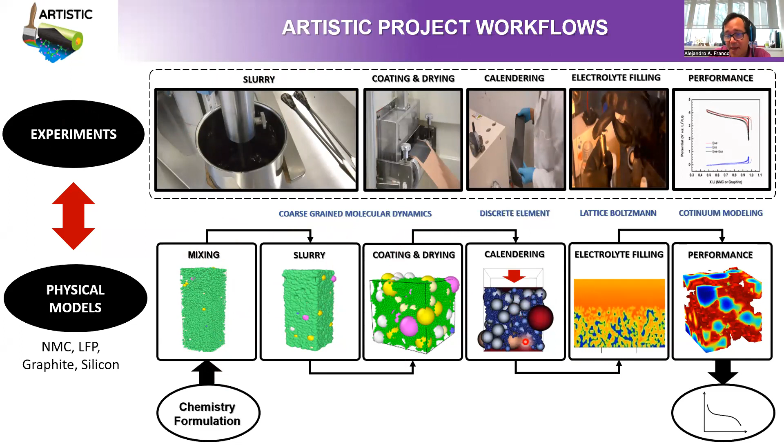We simulate the mixing, which is something I didn't talk about today because the paper is still not written. Then the output of mixing goes into the slurry model. The slurry output goes into the coating drying model, whose output goes as input of the calendering model. The output of calendering goes into the electrolyte model, and the output of the electrolyte model goes as input of the performance model. We have this workflow sequentially coupling all these physics-based models, which are all 3D resolved, describing each step of the manufacturing process.

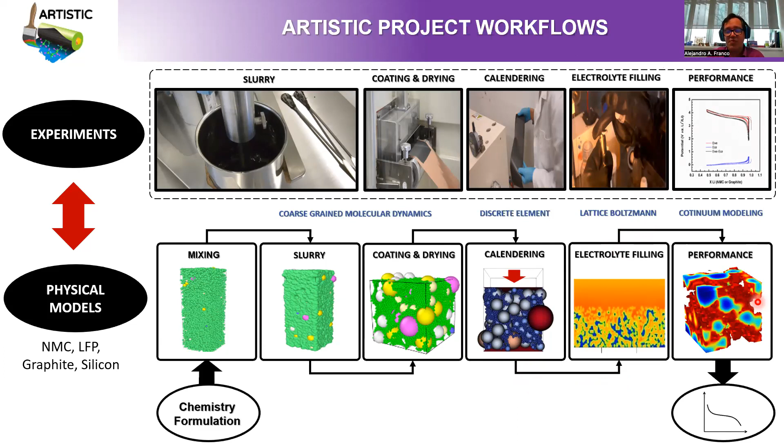Now, what we are doing, and this is something we have started to release already, with the paper reported here, is you can get access to this service now for free. We are integrating these models in a graphical user interface in the project webpage.

Basically, you can connect here for free. You will enter an email, receive a password, and then enter this graphical user interface, which will allow you to perform simulations of slurries, drying, and calendering, just by playing with experimental parameters. That means you don't need any knowledge of computation, because this is a graphical user interface—we want this to be user-friendly for everyone, including experimentalists.

In this platform you can play, for example, with the particle size distribution of your active material. You can also play with the solid content of active material in your slurry, the calendering degree of compression, the drying rate, and so on. So thanks to this online platform, you configure your design parameters for simulating your design manufacturing process, and this will launch simulations in our computational cluster at our university.

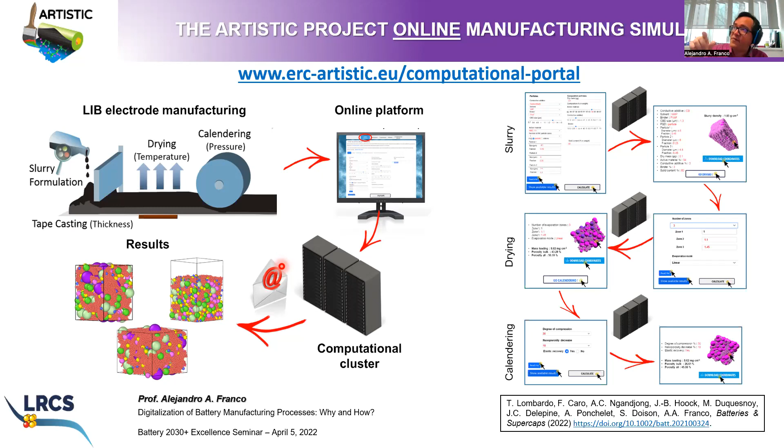Once the simulations are finished, you receive an email with the results. The concept here in this platform is that results are shared with the entire community, so there is no private access. Once results are obtained, they are stored in the database and findable by the whole community that has logged into this platform. But thanks to the email, you will be pointed to your specific result, the one you wanted to simulate.

Here you see some other details of how this interface looks like for the slurry step. Right now we have something like more than 100 simulations performed, and this screenshot is from January. Right now we have 300 users, 75% from academia and 25% or so from industry.

And here you see the kind of results that you can retrieve from this, because you can download the results for your own research. You can download these 3D microstructures and the information associated with them, such as the porosity, the density of the slurry, and so on, for your own research.

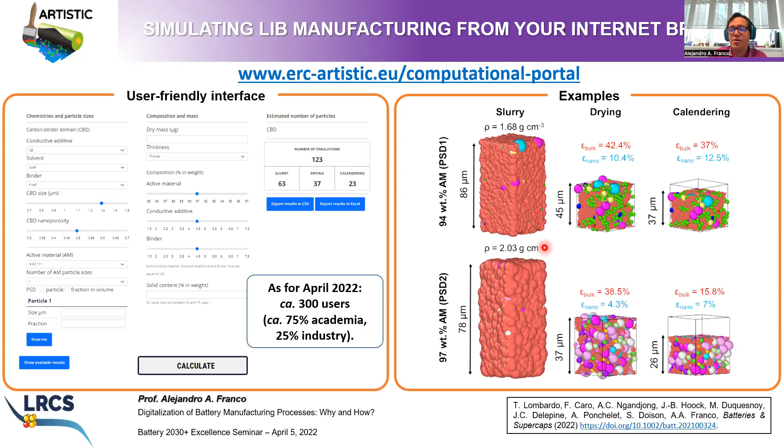Regarding the integration, what we are doing in the Artistic project is combining these experiments with physics-based models, and also with machine learning. The idea is that we are generating hybrid data sets containing experimental results of manufacturing parameters' impact on electrode properties and performance, but also doing the same from the modeling side, because these models are validated in part against experiments. Once validated, they can be used to generate extra data points, giving you a hybrid data set containing simultaneously experimental and modeling points, which can be used in machine learning models.

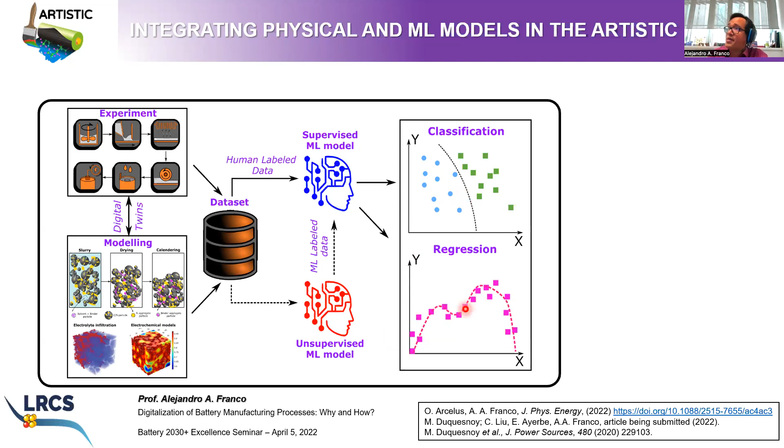These models make predictions in terms of classification, like the example of the influence of slurry properties on electrode porosity, or regression predictions. Now, also in collaboration with Elixabete, we have a co-supervised PhD student, Marc Duquesnoy, funded by ALISTORE. We are demonstrating that this concept can be integrated into an optimization algorithm that can be used to maximize and minimize properties simultaneously.

I believe this is very useful and interesting, because you can show that using synthetic data sets produced from these physics-based models, you can perform optimization of the electrodes. You can come up with optimal manufacturing conditions needed to make an electrode with, let's say, maximal electronic conductivity. I cannot disclose more because this is a paper in preparation, but it will be submitted in a few days.

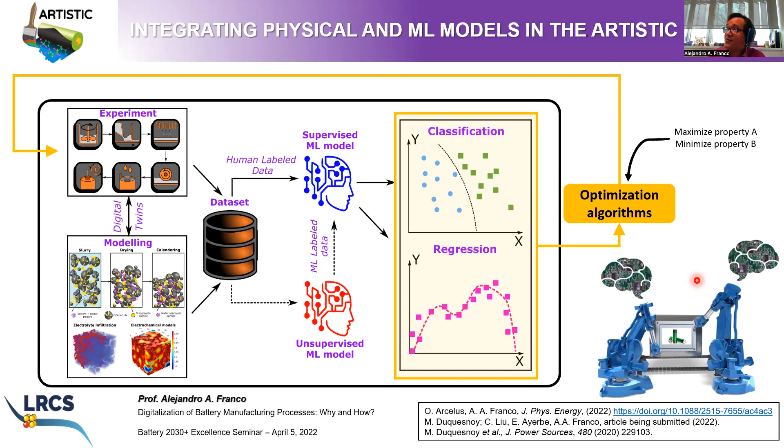I believe this concept goes beyond autonomous battery manufacturing using robots that can take decisions on the fly. They can optimize the battery manufacturing process on the fly just by collecting data from on-the-fly characterizations, for example of electrode thickness, but also from data coming from physics-based models. This is the long-term vision we have for this project, which I think nicely fits the roadmap of Battery 2030 Plus that was presented by Eli.

Let me conclude with some final words for the last 5 minutes, about education and training. We are working very heavily on the use of virtual reality and mixed reality, already for some years, and we have developed in this context several serious games.

These games will allow you, for example, to navigate inside electrode microstructures to calculate the tortuosity, the geometrical tortuosity of the electrodes. This game is very useful to make students understand that tortuosity is an anisotropic property.

Also, we have a game where we invite students to drive an electric car with different battery technologies and different types of active materials, so they can understand how these battery types influence the autonomy of the electric car. In this case, you need to collect 3 presents, randomly distributed in a virtual city, in the shortest time possible, by escaping from police cars.

We have also developed a game which simulates a smart grid, where the car can now be recharged at recharge stations only if you have electricity available in the grid.

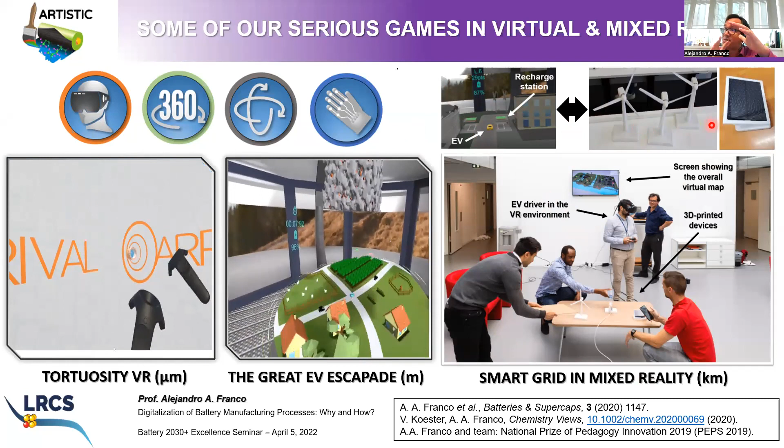And this electricity which is available in the grid is produced using 3D printed objects representing windmills at low scale, and also solar panels and other devices, right? This is an interactive game, so it can be played by up to 20 students, who can play together, with some students generating electricity, distributing electricity, and so forth, interacting with these objects.

While the other student is going to drive the electric car, right? But if there is no electricity in the grid, it will not be possible for that student to recharge the car. So this requires collaboration between the students producing electricity in the real world and the student driving the car in the virtual world. These objects are interconnected with each other using Bluetooth technology, okay?

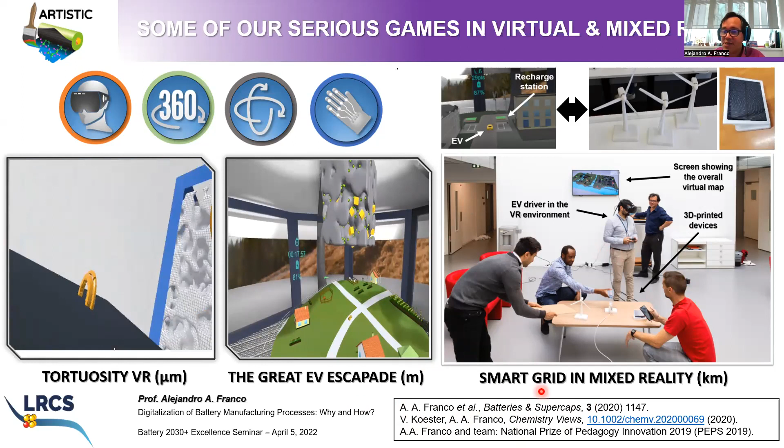And this is a concept that we published in Batteries and Supercaps in 2020. And for all this work, we received one of these national prizes for pedagogy innovation in 2019.

So recently I won an ERC proof of concept grant, for a project called Smartistic, where we intend to embed artistic models, machine learning models, and physics-based models in HoloLens technology. This is a technology which allows you to see holograms superposed onto the real environment. The idea is providing assistance for training and for research directly in the place of experimentation and where we manufacture battery cells, right?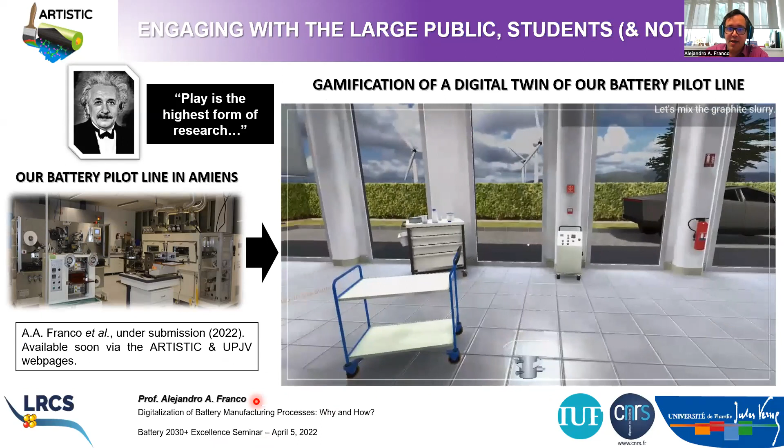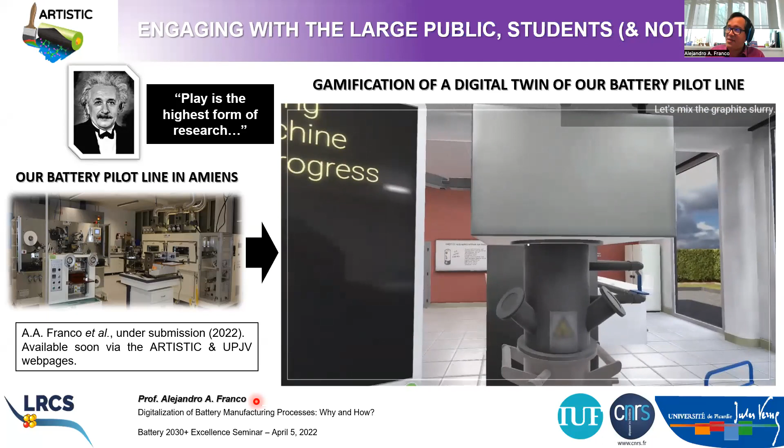And last but not least, this is something I promised on Twitter. I was going to show today a new concept of digital twin. This is actually a game we have recently developed, which invites people to navigate inside our prototyping line, and interact with the parameters and the different machines, but in a gamified way. The idea here is fabricating cylindrical cells, right?

Here you see the interaction with the mixer, right? Then you take the prepared slurry and perform the coating, then perform the drying after you choose the right parameters. You will see then what happens.

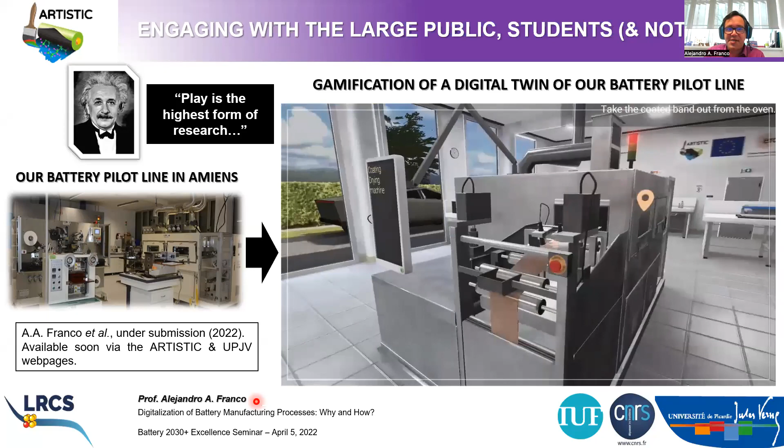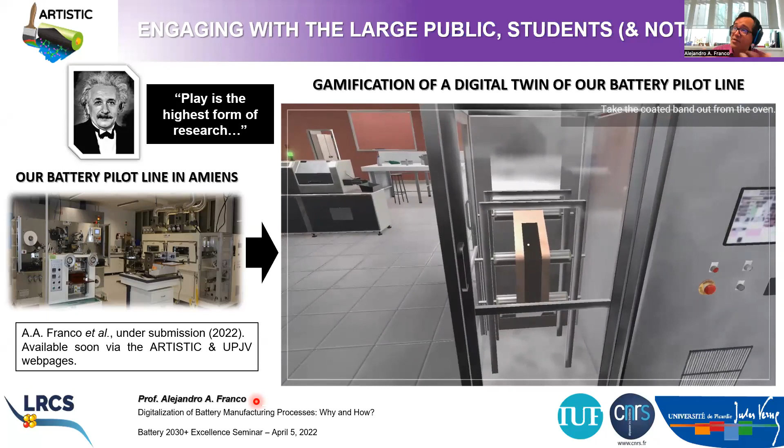I believe this resonates with the quotation attributed to Albert Einstein, that play is the highest form of research, because this kind of tool can be very useful for training and for introducing people to how we manufacture cells in an interactive way. You can interact with this object through an internet browser, okay?

I forgot to mention, this is very important: this game is going to be published through the ARTISTIC webpage and through our university webpage, and you can play with the mouse of your computer, okay?

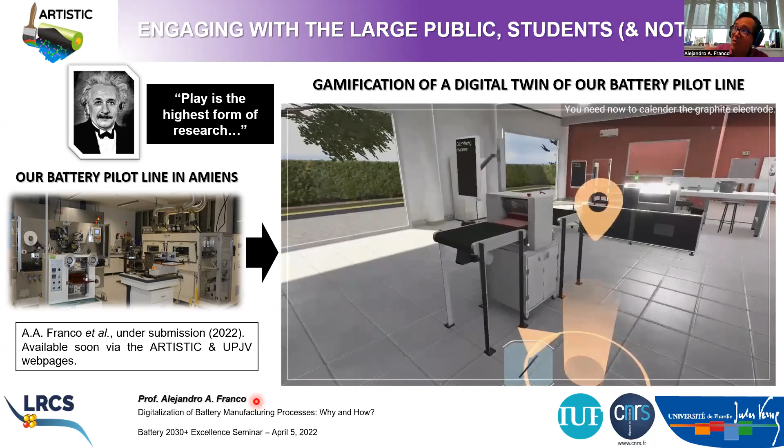I believe this game can also be a starting point for a new way of doing research, because we can imagine embedding in this kind of graphical representation machine learning models or physics-based models that make predictions of what is going to happen when you play with the parameters of calendering in some way and no other way, right? Maybe it's another way of making computations, instead of learning about programming or using classical graphical user interfaces — you can basically perform simulations just by interacting with objects in the virtual world.

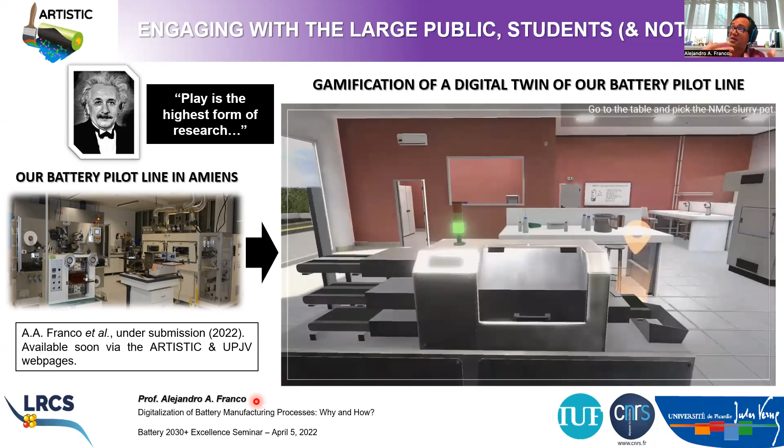So what we plan to do with this game is also put it in a virtual reality environment. In that case, you will have full immersion, but you will need a headset, right?